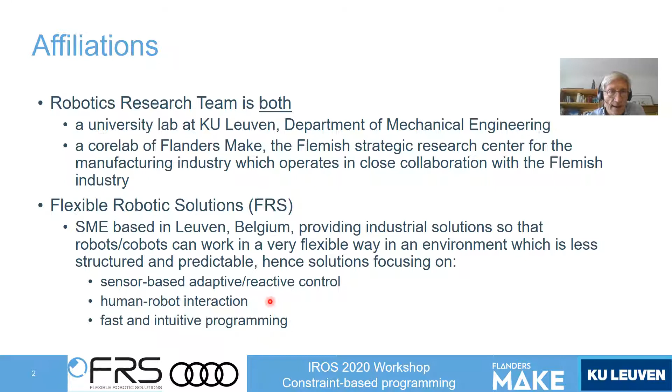Hence, they provide solutions focusing on sensor-based adaptive or reactive control, human-robot interaction, and fast and intuitive programming. You can find more information on these affiliations on these web links. I also would like to acknowledge the support of Project FINROP, a Flanders Make project, and I will explain the name FINROP later in this presentation.

The outline of this talk is that first I will present the industrial application, then I will briefly explain the approach and the implementation. Of course, I cannot give a lot of detail. And then I will also summarize our view on the benefits of using a constraint-based robot programming approach for such application, ending with a conclusion and outlook.

The application is about ultrasonic, or in short US, quality inspection of fold glue joints of car parts at Audi Brussels. The car parts are doors, trunks, or hoods, and these parts are manufactured by joining two plates or two sheets. The outer sheet is folded around the inner sheet, and some glue is placed in between. That's the blue substance here.

What we want to do in the application is inspect the presence of glue using an ultrasound sensor. This is the inspection direction. We can also inspect from this side, but in this application we inspect it from this side in order to make sure that the joint is properly closed.

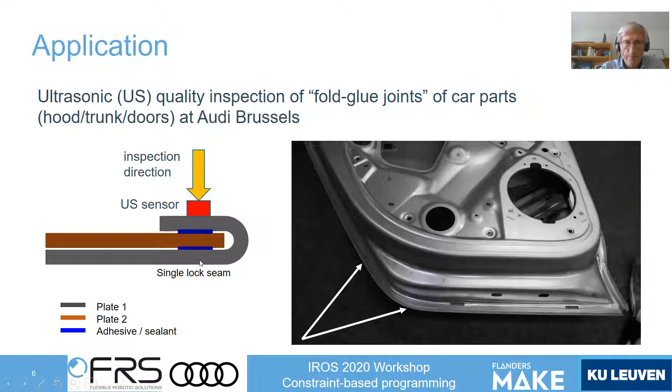Now, the joint to be inspected, you see it here, it seems quite smooth, but if we zoom in, for example, on this section, you see that it is quite deformed. It has local deformations with respect to the CAD drawing due to the manufacturing process. And in particular here, you see marks of spot welds, which deform locally the shape of the joint.

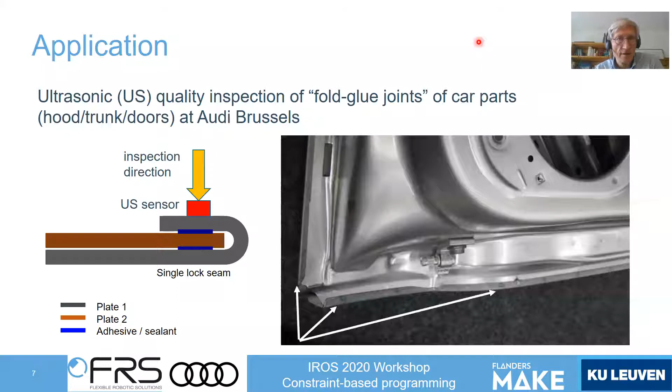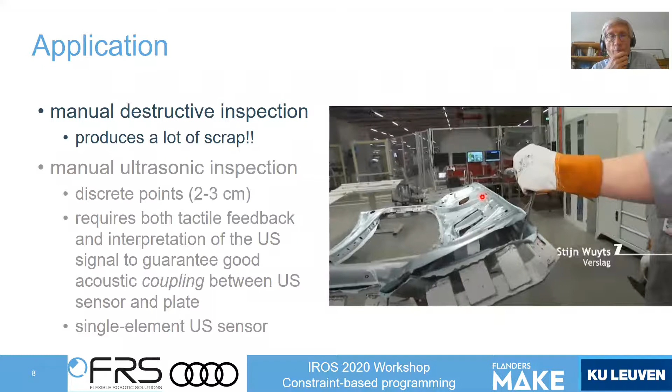So then the question arises, how is this inspection done manually today in the companies? Well, one approach is, of course, destructive inspection. Here you see an operator who opens the joint manually and then inspects the presence of the glue, that is the blue substance that you saw.

Another way is ultrasound inspection, but done manually. Here you see the operator pressing the ultrasonic sensor against the part. And... sorry, but the video stops. I will try to.

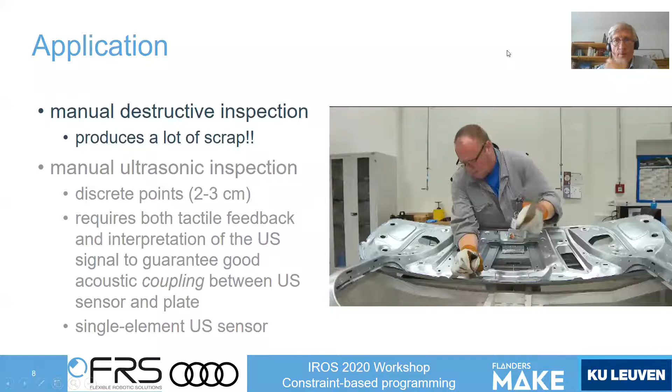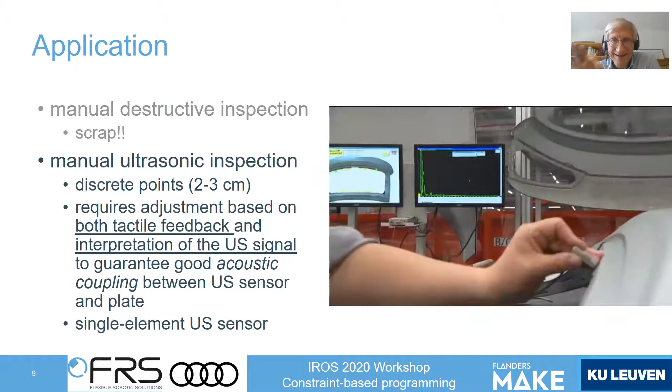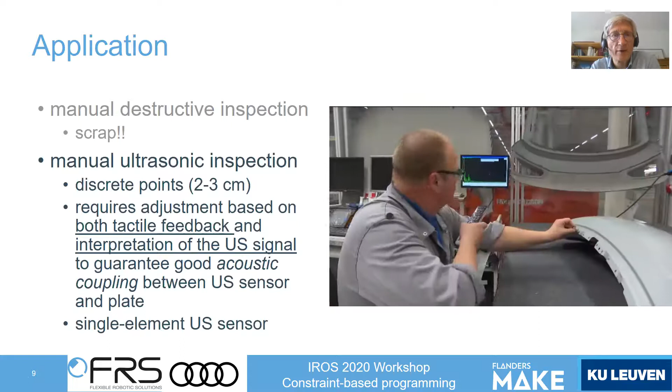So here you can see the operator is pressing the sensor against the workpiece. So he's using his tactile feedback. At the same time, he's watching the screen to look at the ultrasound signal. And if there's a good reflection pattern, he knows he has a good acoustic coupling. And then he presses the button using his remote control and does the recording.

So, starting from manual ultrasonic inspection, which was only done at discrete points 2-3 centimeters apart, the specifications for the automatic inspection were that we needed higher resolution, more points. So the idea was to have a continuous tracking of the fold glue joint. Also, of course, we want to automate the adjustment of the sensor to achieve good acoustic coupling by both tactile feedback and interpretation of the US signal.

Also in this application, the sensor that the operator was using was just a single element sensor, was replaced by a phased array US sensor with 32 elements, but maybe that's a detail for the discussion and I will not comment more on that. But very important, the company required that all 8 different parts of a car would be inspected on the same cell with no clamping of the parts.

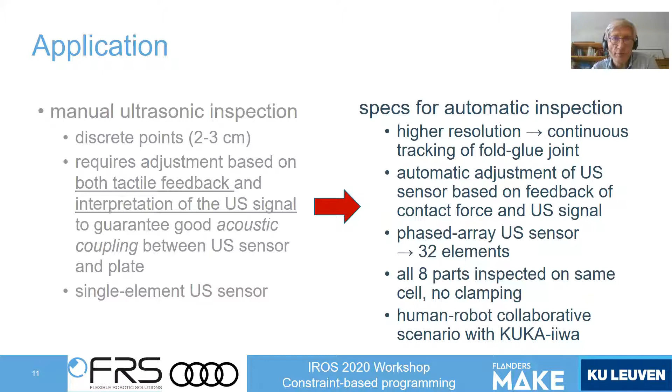And also they preferred a cell with a human-robot collaborative scenario using the KUKA-iiwa robot. Clearly, these specs introduce some challenges. I already pointed at the local variations in shape of the joint with respect to the CAD model.

The fact that 8 parts are inspected on the same cell, just placed there without any clamping, introduces a lot of positioning uncertainty of the part in the Cobot cell.

On the other hand, the use of a KUKA robot introduces several issues. First of all, the KUKA-iiwa is much too small to inspect such large parts. There is insufficient workspace or insufficient reach.

And of course, working collaboratively with a human and a robot introduces safety issues and also human error. So we have to provide robustness with respect to human error.

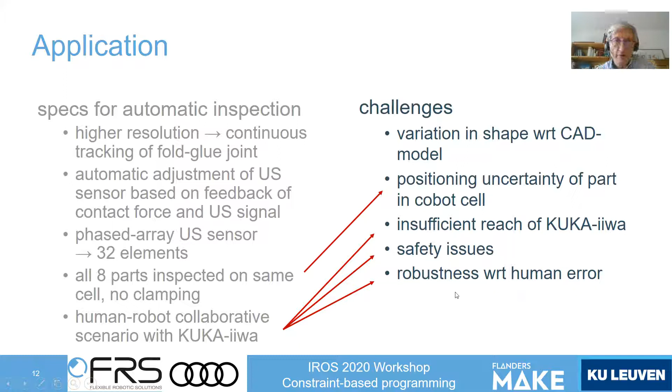The approach followed by FRS was then to implement a continuous contour tracking based on force feedback while monitoring the ultrasound signal. And if this signal, if there's good acoustic coupling, is dropping below a certain level, the robot stops and makes a discrete adjustment to find a proper orientation for the sensor.

The insufficient reach of the KUKA was solved by adding a degree of freedom. You will see immediately that the KUKA is hanging from a rotating table. So there is a turntable that was introduced as an extra degree of freedom in the system.

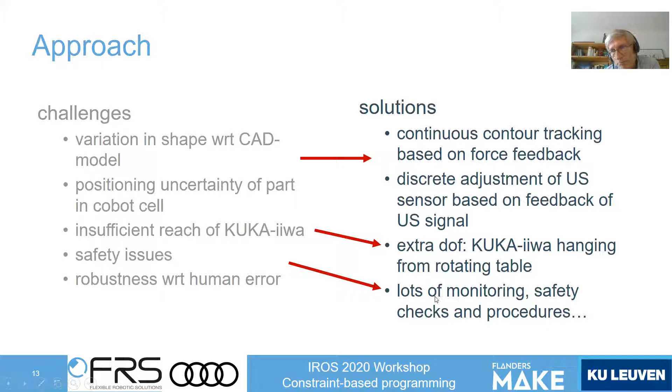The safety issues and robustness with respect to human error were solved by a lot of monitoring, safety checks, and safety procedures.

Here is an overview of the Cobot cell. You recognize the robot iiwa here. And it has, of course, a joint torque sensing, which is very appropriate to do human-robot interaction, but it's not accurate enough to do this fine contact force sensing to do proper contour following.

So we added a force torque sensor here at the end effector. Here is the ultrasonic sensor, a phased array sensor with 32 elements. Here you see the turning table, but the center of the table is here.

What are the tasks to be performed by the operator in this collaborative scenario? Well, first of all, the operator has to load a support piece on which the part to be inspected is mounted. Then he has to load the part to be inspected.

He has to guide kinesthetically the end effector with the ultrasound sensor to the starting point of the first segment to be inspected. And he's also responsible for dispensing a couplant fluid. That's a fluid that has to enable good acoustic coupling.

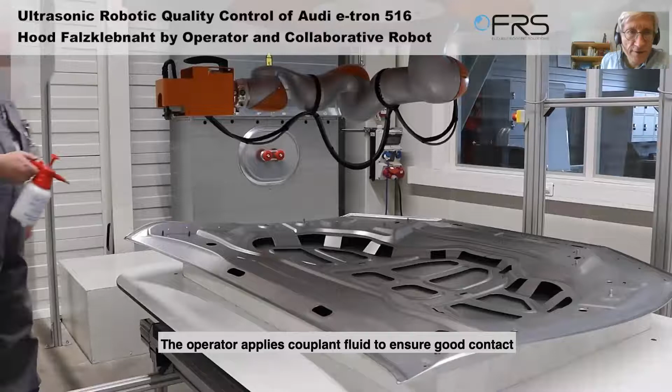Here you see the cell in operation. There is a longer video at the FRS website. Here we see the operator dispensing the couplant fluid. The part is already mounted on the support piece.

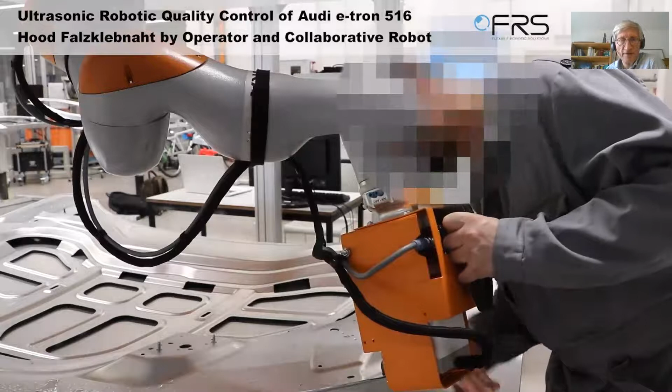Then the robot automatically moves towards the first segment to be inspected. Since there is a large positioning error of the part in the cell, the human guides the robot and brings the sensor to the first point to be inspected on the first segment.

And then the robot continues automatically to do the inspection. It adjusts the orientation of the sensor and then follows until the acoustic coupling drops below a certain value, as I explained. Notice that the speed here in this video is multiplied by 8.

So sometimes the robot stops, adjusts the sensor, and then at the sharp edges, the robot retracts, goes to a new position, makes again an approach, and continues inspection.

You see in this segment, the robot needed not many, if any, stops to correct the acoustic coupling.

Okay, some words about the implementation. As mentioned during the introduction, FRS embraced the use of constraint-based programming and the use of eTaSL.

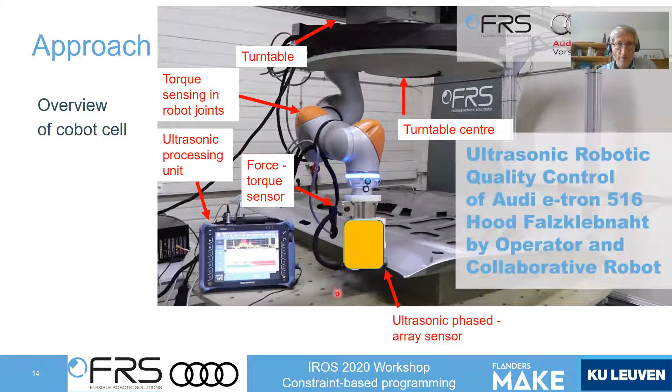For example, very important is collision avoidance. As you can see here in the setup, the robot or its end effector can collide with the turning table, can collide with the part, can collide with the table, can collide with the bridge here. This is supporting the robot.

So we had to provide collision avoidance constraints, also workspace limits. And very important are, of course, the velocity limits. They're very important in general, also for other applications, but in particular for cobots, because there are very strict specifications of maximum speeds for all parts of a robot arm in a human collaborative setting.

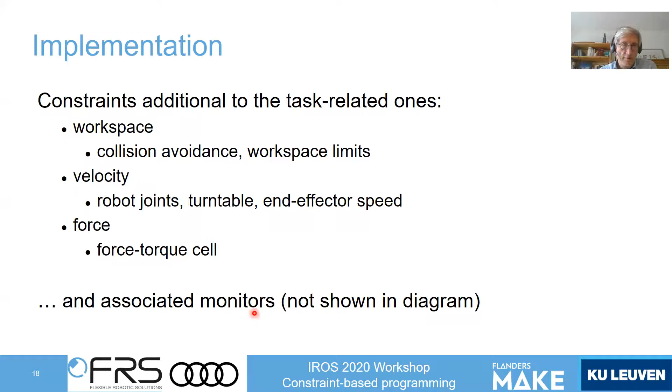So in fact, FRS went through this procedure to make this system suitable for human-robot collaboration. So went through a certification process to certify this 7+1, 8 degree of freedom system as a Cobot. Of course, we had to monitor all these constraints. So we built modules, monitor modules to monitor the constraints, but I didn't show them in the diagram.

I want to mention two special features of the implementation. First of all, programming new parts becomes very easy because you can use the force-based contour tracking for learning the shape of new parts. So that's the idea of fast and intuitive robot programming. The robot is programming itself. And in fact, fast and intuitive robot programming was the name of the project, the Flanders Make project.

Another important feature is that FRS made use of switching to the KUKA-iiwa Sunrise controller for several subtasks and making use of a module that is available in the Sunrise controller. For example, the kinesthetic guiding of the end effector to the first point to be inspected is implemented not by an eTaSL component, but by a Sunrise module.

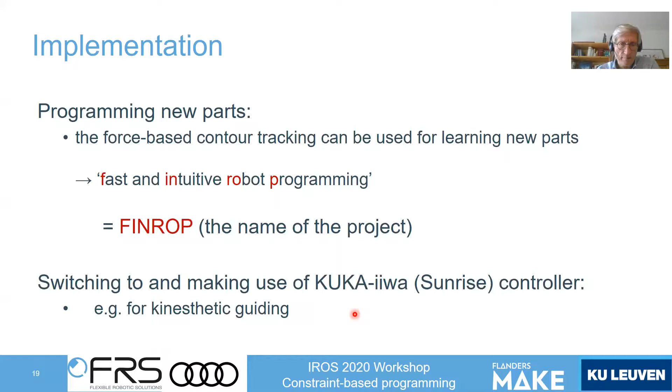In the next two slides, I would like to summarize our experience with the constraint-based approach for this industrial application. First of all, we experienced that specification of advanced tasks is quite convenient. And I'm not only talking about the reactive sensor-based tasks like the force-based contour following, but also about the addition of other constraints related to workspace or velocity limits and collision avoidance, which are very, very important in an application with a high degree of uncertainty.

Also, we experienced that tuning the parameters in ETASL is quite intuitive. I would believe that Erwin explained that the tuning parameters have a physical meaning. There are two kinds of parameters, the feedback gains and the weights. The feedback gains are relatively easy to tune since their magnitude is limited by stability and joint limits in terms of velocity and acceleration. So if you tune them up, then you run into stability problems and joint limit problems. So they are quite easy to tune and choose a good value.

The weights are also intuitive to tune. We know that only their relative magnitude matters, corresponding to the relative importance of the constraints. But like others, we experience that the overall system behavior becomes less predictable when many constraints are active simultaneously.

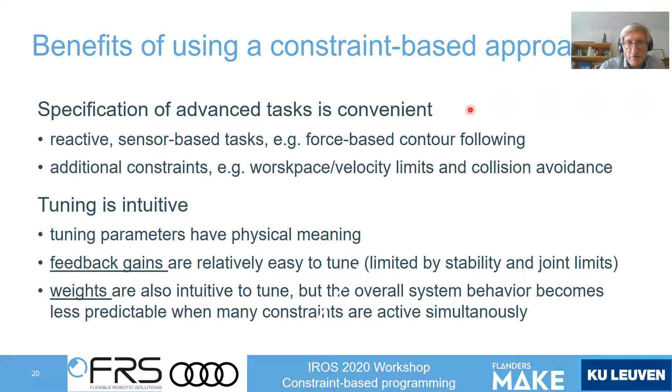Also, we experienced that the change of platform is very easy. We added, as I explained, a turntable as an 8th degree of freedom to the KUKA-IWA robot, which is already 7 degrees of freedom. And this went very, very smoothly. It just boils down to changing the kinematic model of the robot, and the rest involves no change. Also, we can rely on a good resolution of the kinematic redundancy in ETASL.

A final word is about the switching. So we know that the library of components of ETASL that is available is quite limited, but we can focus on the development of new tasks, new applications, in combination with switching to the commercial robot controller for the solutions and components that are already available.

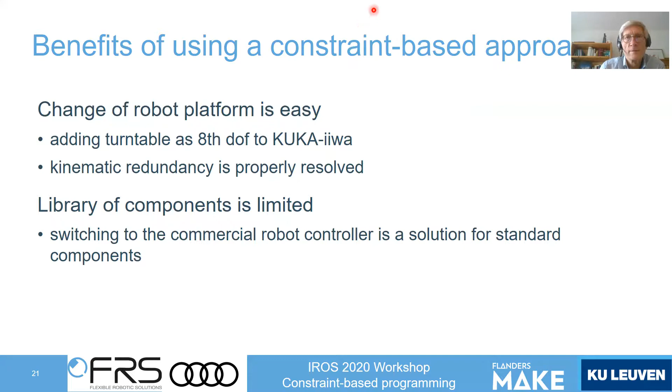As a conclusion, I would like to say a few words about the results and the impact of this project. Clearly, this application, this automated Cobot cell, relieves the operator from a tedious task. It delivers consistent high quality measurements, which are recorded automatically, which can be archived and which can be analyzed later on in detail. It deals with a lot of geometric uncertainty. As I said, the position of the workpieces is uncertain, and also the shape of the workpieces is uncertain. It's varying and deviates from the CAD model. And the cell performs much faster than manual inspection.

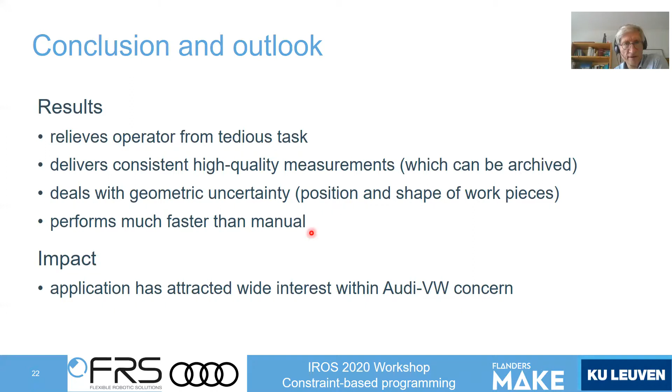As for the impact, this application has attracted wide interest within the Audi VW concern. And the feedback from people in the concern is the following. Thinking in terms of behaviors instead of robot set points is quite revolutionary in industry. So I strongly believe, together with them, that there is a future for constraint-based approaches in real industrial applications.